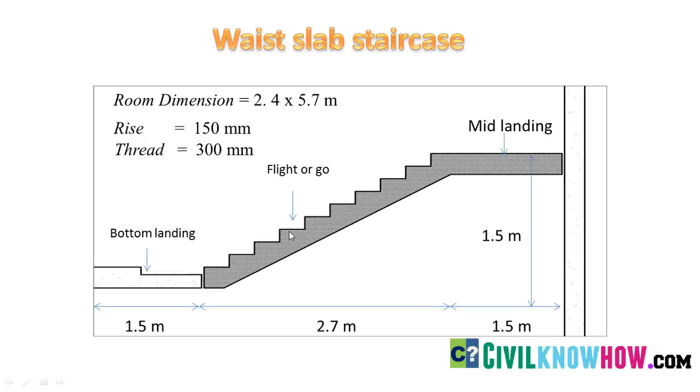respectively. And the next part is the mid landing that is about 1.5 meter from the floor level and having a span of 1.5 meter. And here we are going to assign the staircase in a room dimension of 2.4 into 5.7 meter. And when we go for modeling, we are going to only model the waist slab in the case of flight or a go, and the steps are going to be assigned as a dead load. You will be getting a better clarity about this when you go ahead with this tutorial.

So here I have already finished modeling a small commercial building that is having a 3 meter floor height.

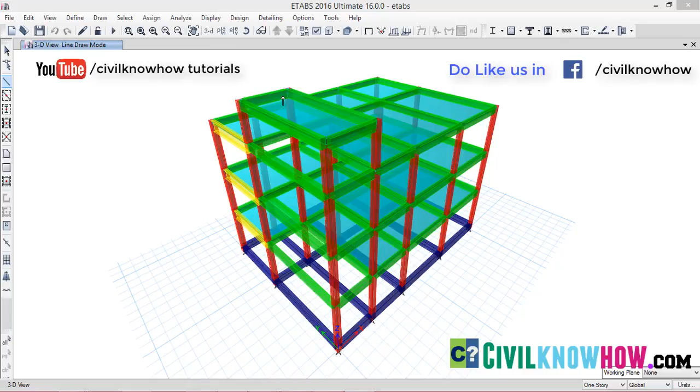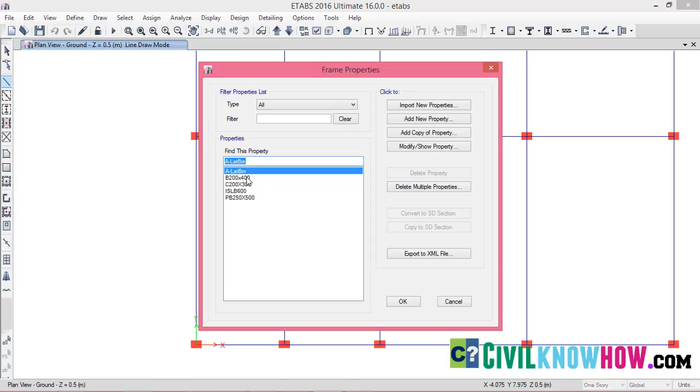So for that, let's go to plan and select ground. And let's get rid of this extruded view. So here I need to assign a ground floor beam which is 1.5 meter in distance from this beam. So here I have already defined a beam in frame sections, that is B200 400. So this is a beam that I'm going to assign as my ground floor beam for defining the stair.

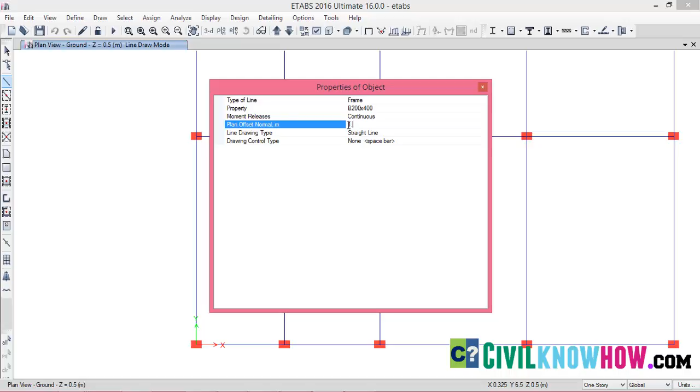So click on draw beam or column option, and in property I'm going to select B200 into 400, and I'm going to offset this beam by 1.5 meter, which is the span of the bottom landing level. So here when I offset it, right now I have obtained a ground beam of 1.5 meter.

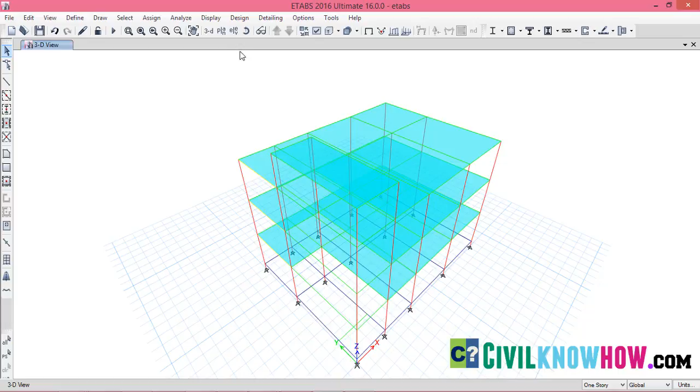So the next step is actually defining a beam between the first floor and the ground floor, that is at 1.5 meter from the ground floor. So for that, let's go to the elevation and select the grid line A, which passes through the staircase beams. So here 1.5 meter from the ground floor, I need to have a mid landing slab plus a beam.

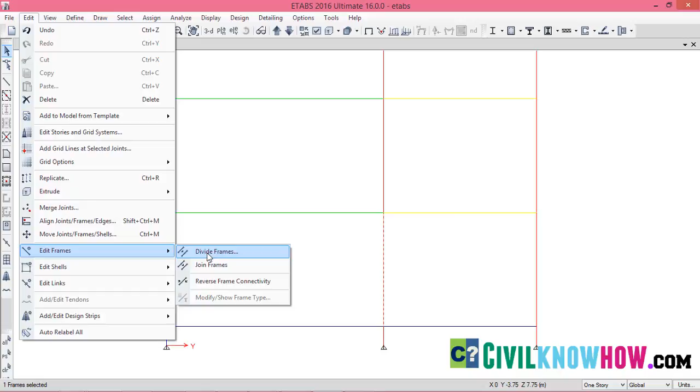So what I'm going to do is that I'm going to select this column and I'm going to go to edit, select edit frames and click on divide frames. So here I'm going to select the first option, that is divide into two frame objects. If I select this one, it will be dividing the frame into two equal frame objects.

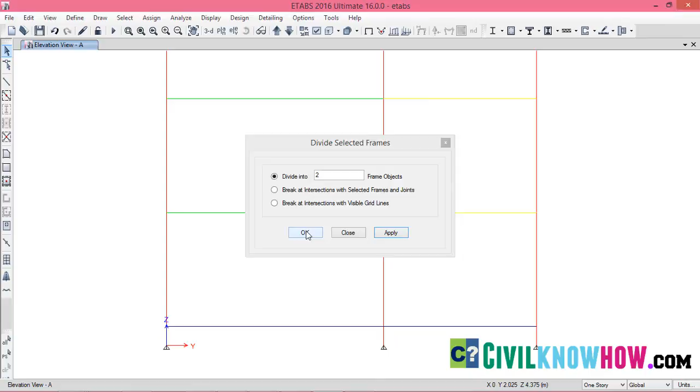So since my floor height is 3 meter and I need my landing beam at the mid level at 1.5 meter, this will work. So click on apply and OK. So now you can see that the column is being divided into two parts. And next let's go to 3D view.

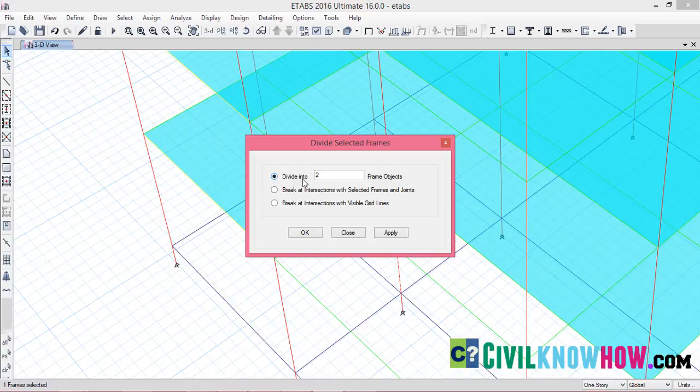And let's zoom here a bit. So here we have divided this column into two equal parts, and in similar manner let's do the same with this column also, so that we can connect a landing beam over here at the mid level. So let's select this column and go to edit, and from edit frames select divide frames, and we select the first option and click on apply and OK. So now the column over here is also divided.

And now let's join these two columns at the mid level by creating a mid-level landing beam. So let's go to create or draw beam, and let's select the B200 into 400 beam. And here now we have created a mid-level landing beam.

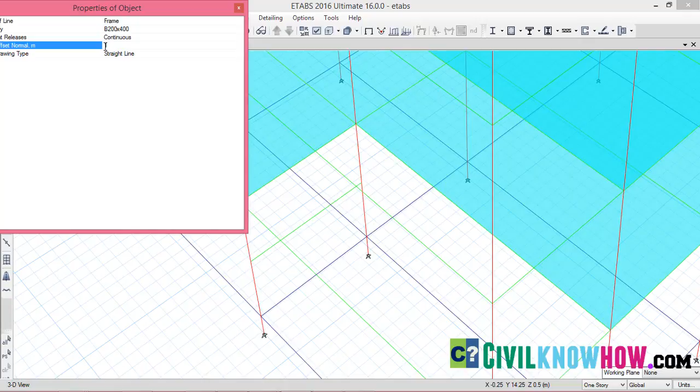So next we need to create a mid-level landing slab adjacent to this landing beam. So for that, let's draw a beam with an offset of 1.5 meter from the landing beam, that is the mid-level landing beam. So here I have just finished drawing an offset of 1.5 meter from the landing beam. So next we need to draw a mid-landing slab. So for that, let's first define the slab.

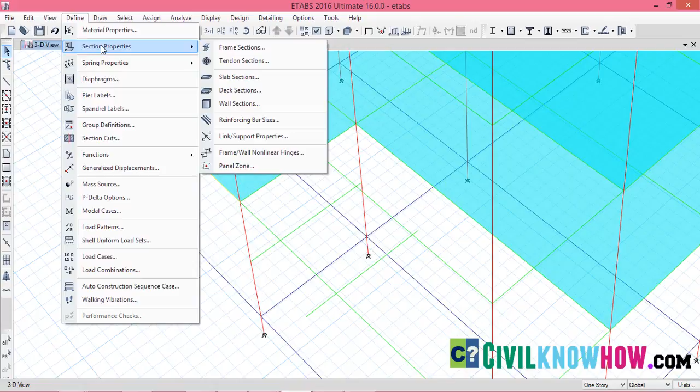So go to define, and under section properties, select slab sections, and here select add new property, and here I'm going to name it as ST200, that is a stair slab or the landing slab with a 200 mm thickness, and the slab material that I'm going to assign is according to the Indian standard, that is M25. And here the modeling type is the shell thin. And next, under the property data, I'm going to select it as slab, and the thickness I have already assigned, that is 0.2 meter, and then click on OK.

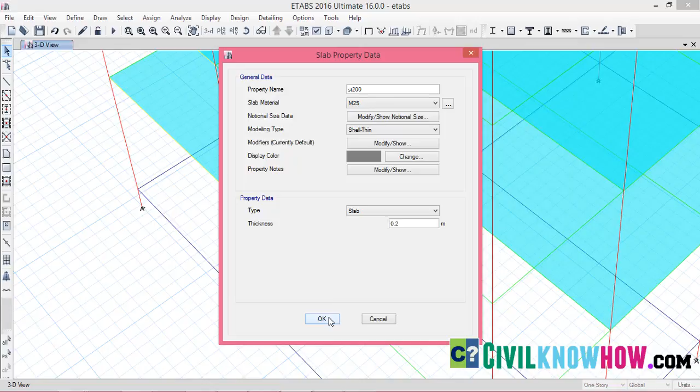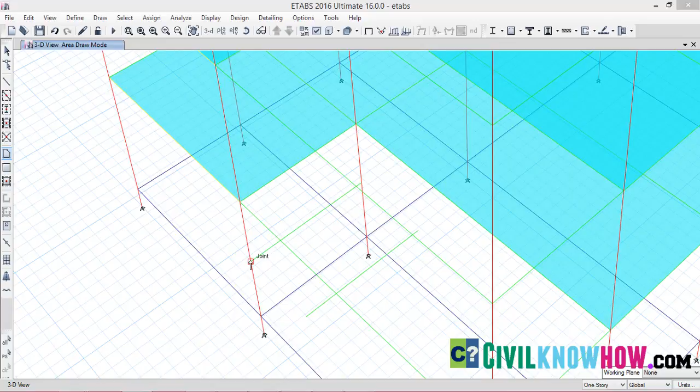OK. So next we need to draw the slab. So let's go to this option, that is draw floor or wall plan elevation 3D. Click on this, and let's select the property as we have assigned before, that is ST200. And now let's assign it by joining the corners of this offset beam and the original landing beam, and click on enter.

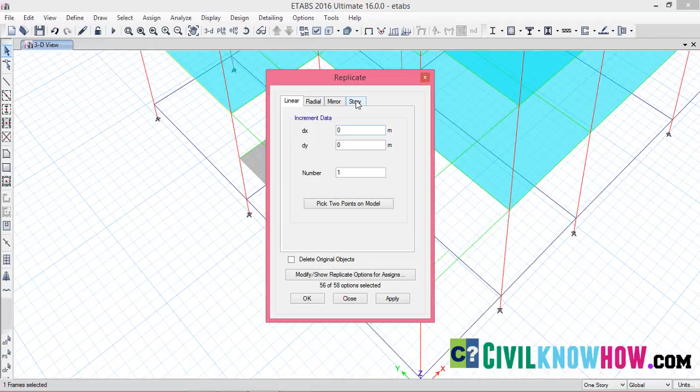After drawing the mid landing slab, now I intend to replicate this ground floor beam to the first floor. So I have selected the beam. Now I go to edit and select the replicate, and go to the story and select the first story, that is F1, and click on apply and then OK. So now the beam is being replicated to the first floor.

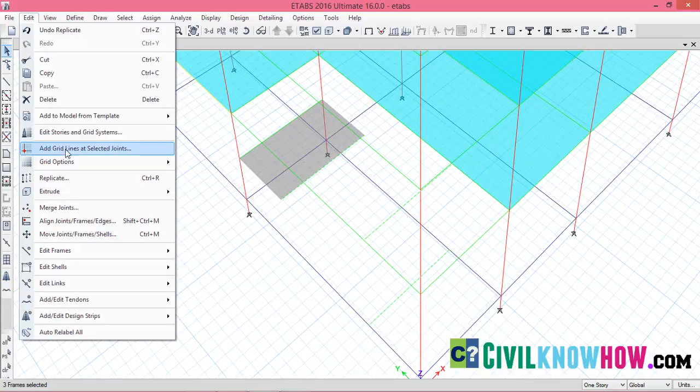And the next step is to divide these beams at the midpoint, because I need to connect the flight stair with the bottom beam and also to the top beam. So I'm going to select the replicated beam and also the other beams connecting the base slab and the ground floor, and go to edit frames, select divide frames, and click on apply and OK. And now the beams are being divided. So next, let me go to the plan view, and I go to the ground.

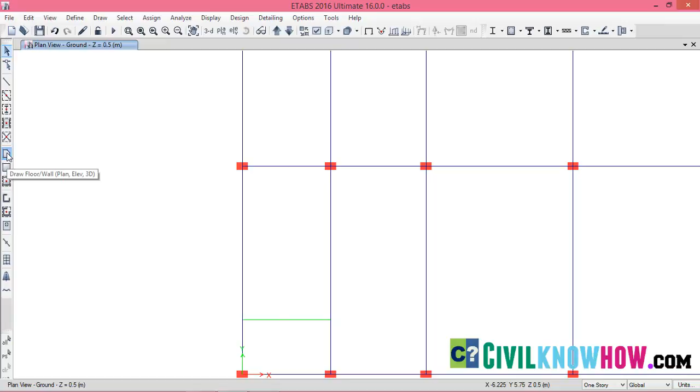So now we need to draw a stair flight that is going to connect the ground floor to the mid landing, and from the mid landing to the first floor. So for that, let's select the draw floor or wall option, and as a property, I'm going to select the slab thickness that I have assigned before, that is 200 mm thick slab.

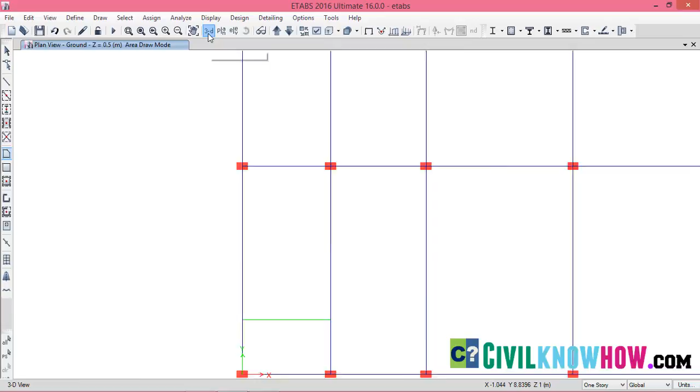So I have just started from this joint and connected with the middle joint, and now I need to go to the middle floor. So I'm going to take the 3D view. This is quite a bit messy, but still it's a good option, and join over here in this middle point and connect it to the other adjacent point, and then come back to the ground floor. So your first stair flight is ready right now, and next what we have to do is connect the mid landing to the first floor.

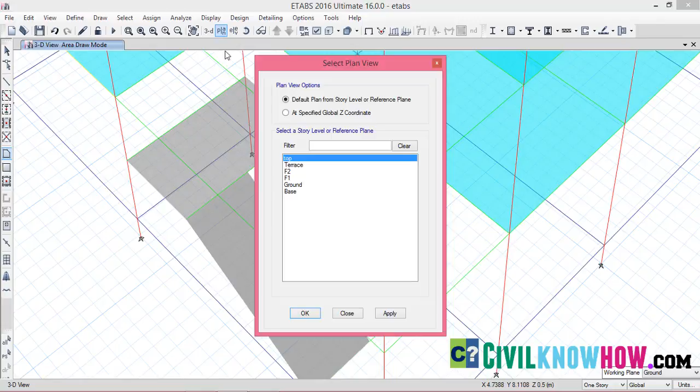So for that, let's select the draw floor option again, and let's go with the same slab, and I'm going to connect these two over here, and let me go to the plan view of the first floor, click on apply and OK, and I'll just zoom a bit.

Okay, hope you can see right now. I'm going to join this midpoint and join this point, and let's go to the 3D view and come back to the mid landing beam or the mid landing slab. So here the two flights of stair are ready, connecting the mid landing slab. After connecting the stair with the slab, we can now delete this beam because it is not actually present in our plan. So let's delete it.

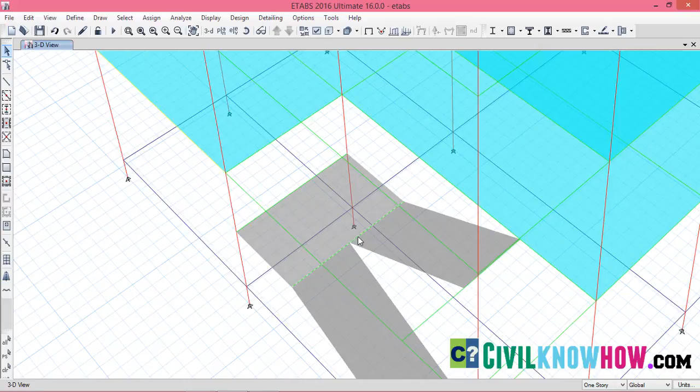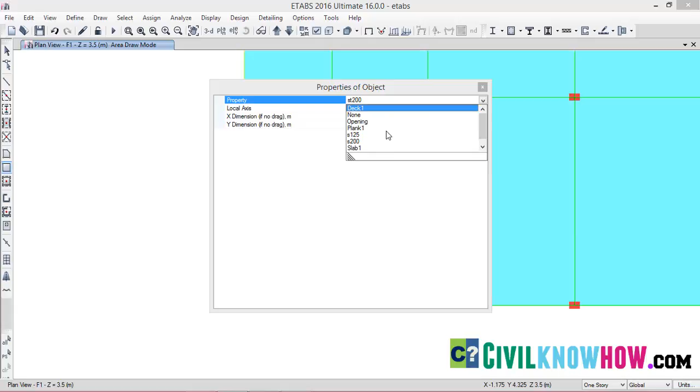And now let's go to the plan of the first floor and assign a slab over this region. I'm going to go to the draw rectangular floor/wall option, and here I'm going to assign a slab of lesser thickness, that is S125, which I have defined before. So here the slab has been defined.

The next step after drawing the staircase is to assign the loads, that is the live load and the dead load. First let us assign the live load. The live load I'm going to assign over this stair is 5 kN per meter square, since it is a commercial building. So I'm going to go to the assign option, select shell loads, select uniform, and under live load assign 5 kN per meter square and click on apply and OK. Now you can see the live load is applied, and next I need to assign the dead load.

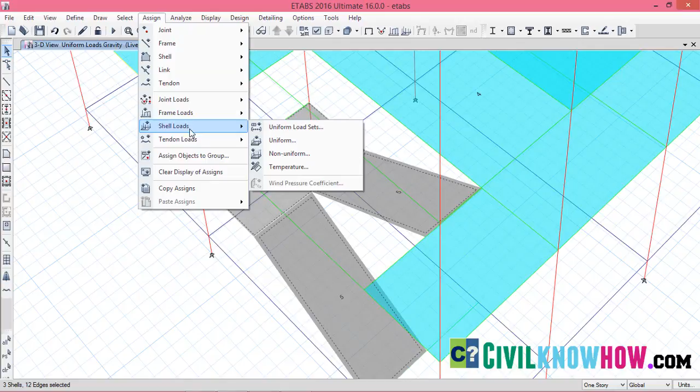I'm going to assign a dead load of 5 kN per meter square, same as the live load, because this dead load includes the weight of the steps plus the weight of the finishes that we're going to apply on the stair. So let us select dead here, keep the value 5, and click on apply and OK. Now we have the dead load and the live loads applied on the staircase.

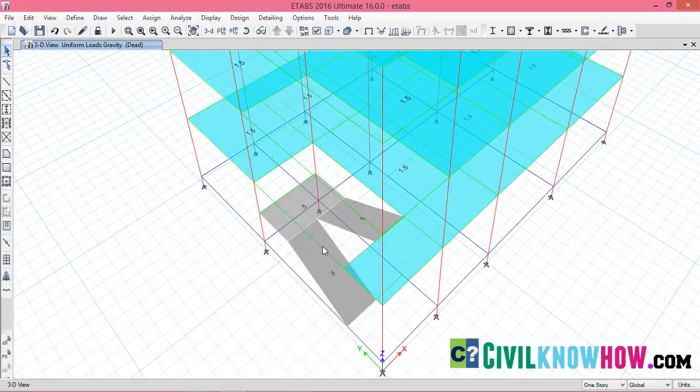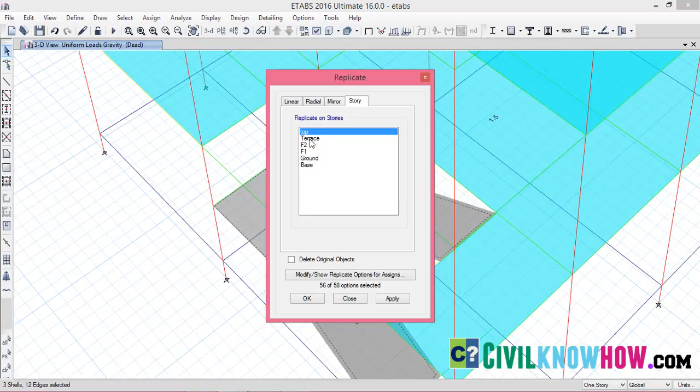Next we need to replicate this staircase to the upper floors, because we don't have to draw it again and again. We have already drawn one staircase, so we're going to copy it to the upper floors. Let's select the staircase, go to the edit option, select replicate, and go to story. As of now, we have assigned the staircase from ground to the first floor, so let's select the stories from F1 to terrace, that is F1, F2 and terrace, and click on apply and OK. Now you can see the stair starts from the ground floor and is connected to the terrace.

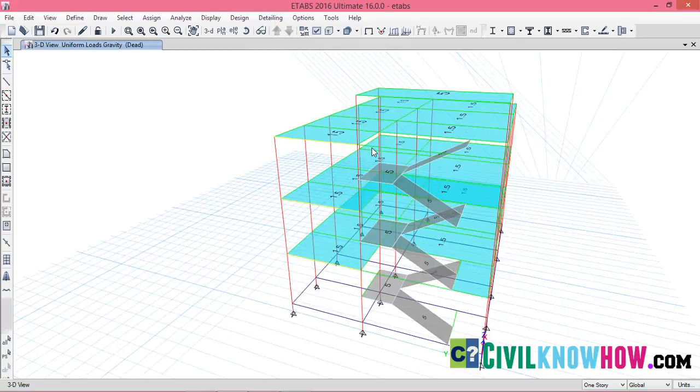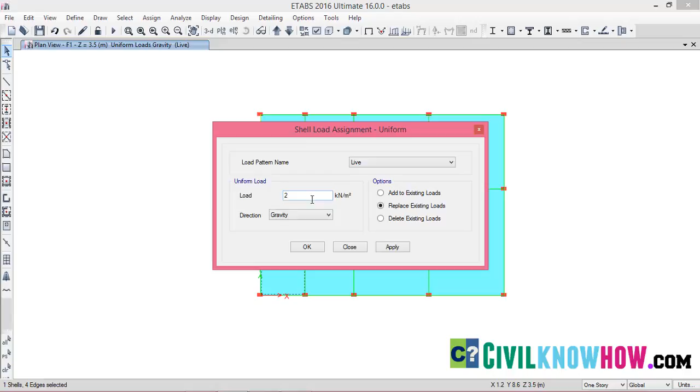One thing missing is the landing slab over this part. So let's assign the load here and replicate the landing slab on the first floor to the second floor and the terrace. Let's go to the plan view again, go to F1, the first floor. I'm providing a dead load of 1.5 and a live load of 2 kN per meter square. Okay, it's 2.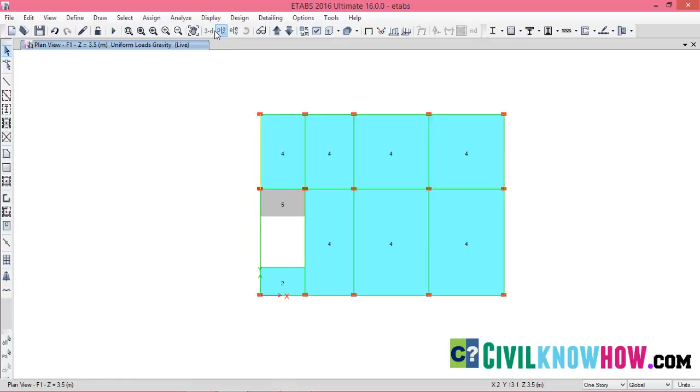Now let's select the slab, go to edit and replicate, the same as we did for the stairs. It's already assigned in F1, so we only have to replicate to the second floor and the terrace. Let's select these two floors and click on apply and OK. Now if we go to a 3D view, you can see that we have finished modeling the stair and also the slab here.

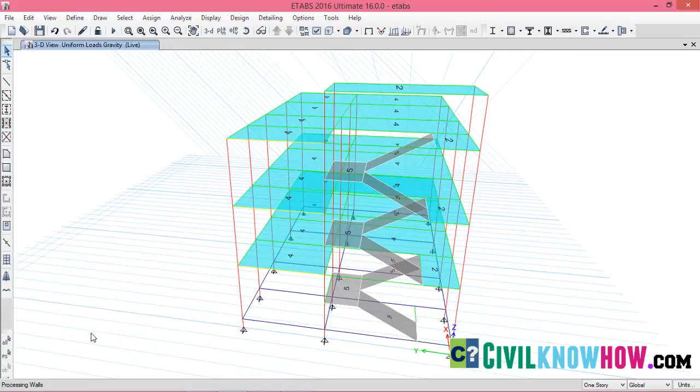If you want to see the rendered view of this model, including the staircase, go to view and click on show rendered view. So this is a rendered view of our staircase. This comes to the end of the tutorial on modeling a staircase in ETABS 2016.